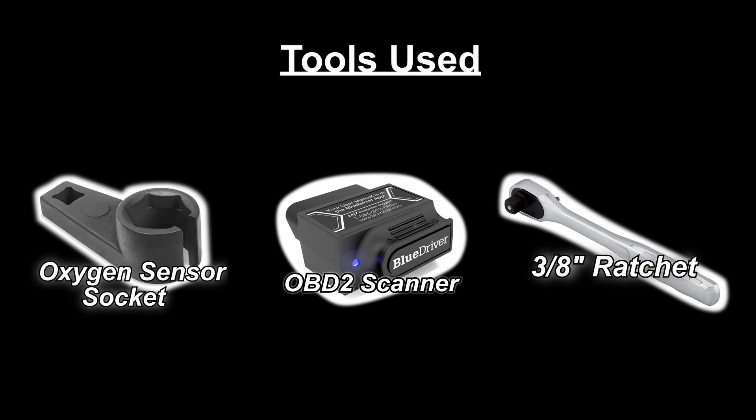And now it's finally time to look into this P0430 code that would randomly come on for the last couple years. P0430 says the catalyst system efficiency is below threshold on bank 2, which is the driver's side of the vehicle. Possible causes, obviously, the catalytic converter itself could be bad. Could have exhaust or intake leaks, fuel injectors, spark plugs, and timing. But another cause could be just bad heated oxygen sensors, which we'll be taking care of in this video.

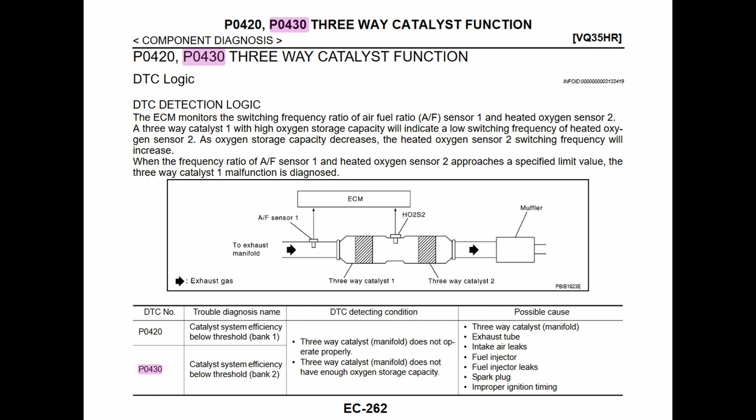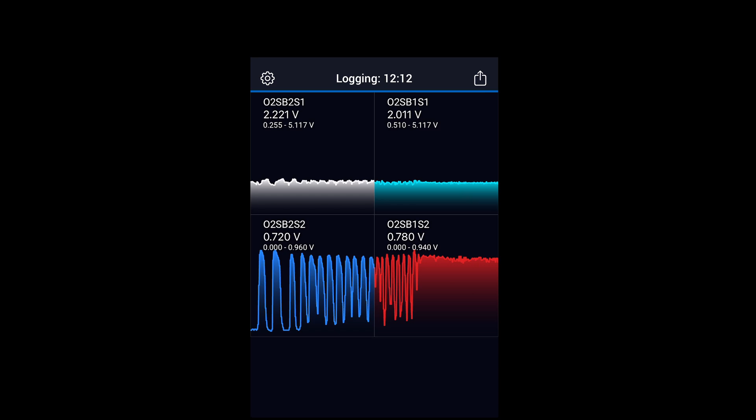You can see that the bank 2 sensor 2 is fluctuating a lot, and then the bank 1 side is fluctuating a little. A good sensor should be relatively flat. You can skip to the end to see a proper reading. But enough talking, let's get into it. Have the car on ramps. Before crawling in, just make sure you have all your safety measures in place.

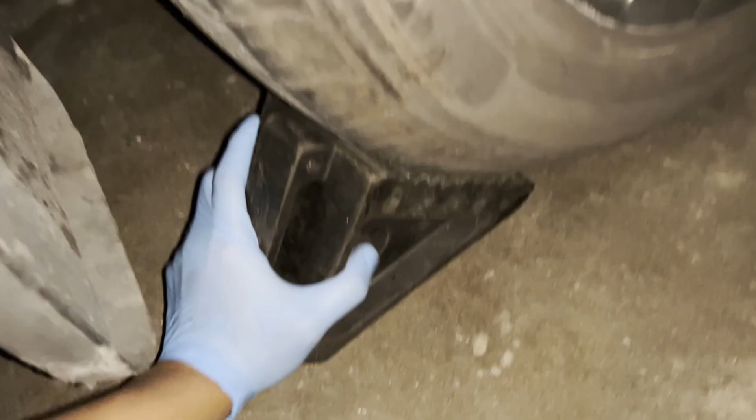Crawling from the driver's side of the vehicle, bank 2 sensor 2 would be this guy here. And then bank 1 sensor 2 will be on the passenger side here. Hit it with some WD-40 to break up the rust. Here's my little makeshift ratchet extension to help give me some more leverage.

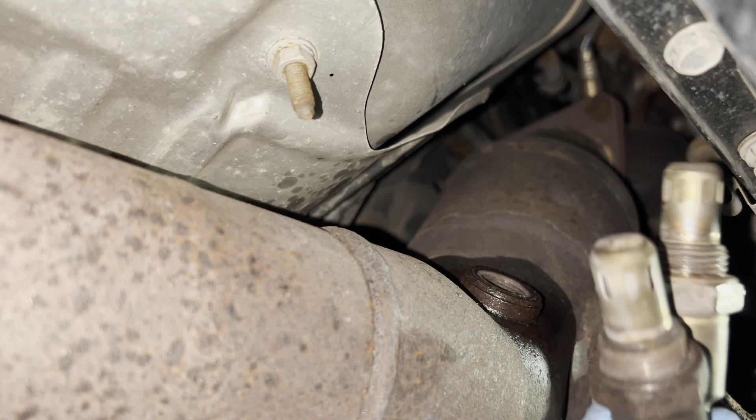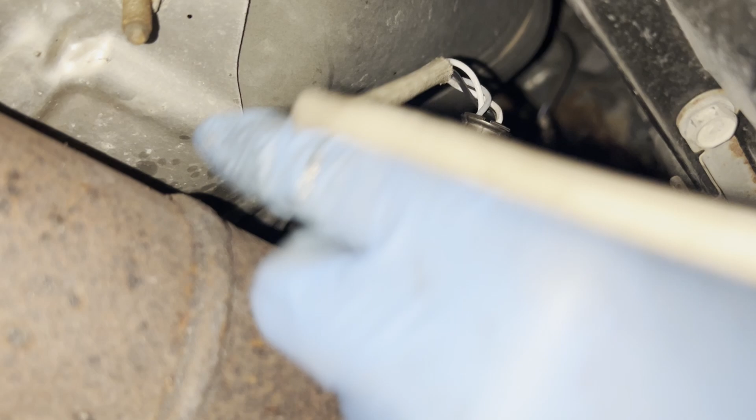Start to see here at the end of the tip of the sensor. It looks like it's a little burnt. Usually you would want to replace with a new sensor, but there's nothing wrong with replacing it with a used low mileage one, which I'll be doing in this case. Anti-seize for the threads. When tightening it down, you can have it snug and some, but if you're torquing it down, use the link below for the offset torque formula.

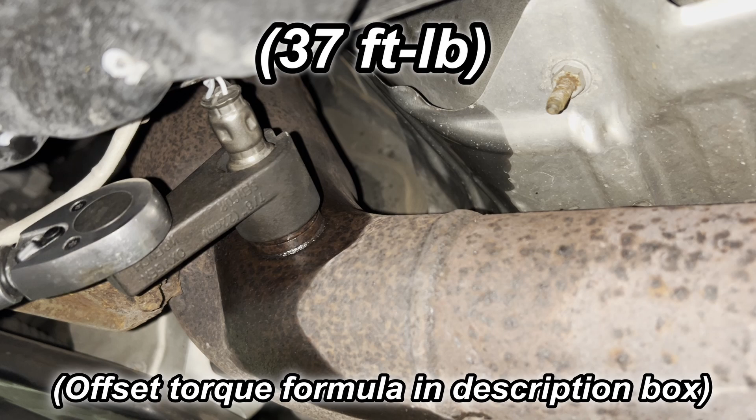And now for the bank 1 sensor 2 side. These plugs can get super dirty and dusty at times, so they might not be able to release properly. Hence why I'm poking it on the tab side. And that's how you replace the lower heated oxygen sensor.